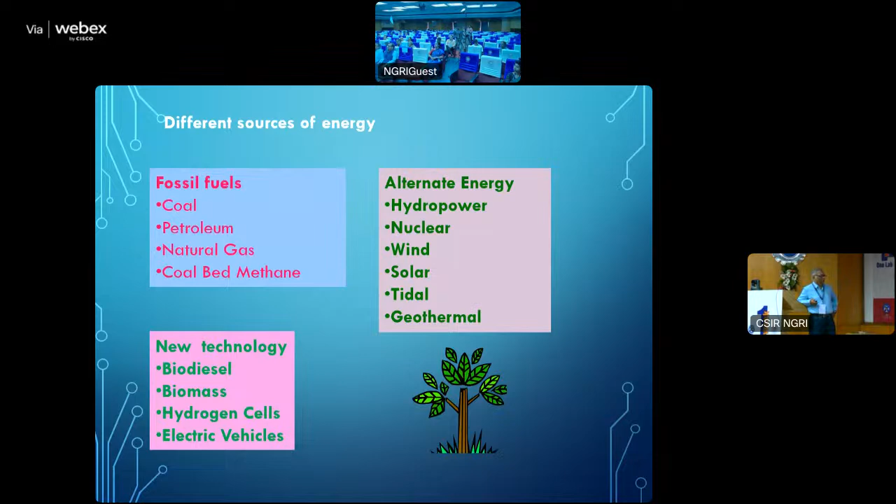The main geothermal fields are mostly associated with the plate tectonic boundaries. And plate tectonics has given quite a big impetus to geothermal research also.

What is geothermal? Geothermal is a new and alternate energy source, which is a continuous source of energy. It is heat stored in rocks, which is brought to the surface by the deep circulation of water. And this energy is renewable and very sustainable. The plant in Italy, Larderello, has been running continuously for more than 100 years. So there is renewability and sustainability in this energy source.

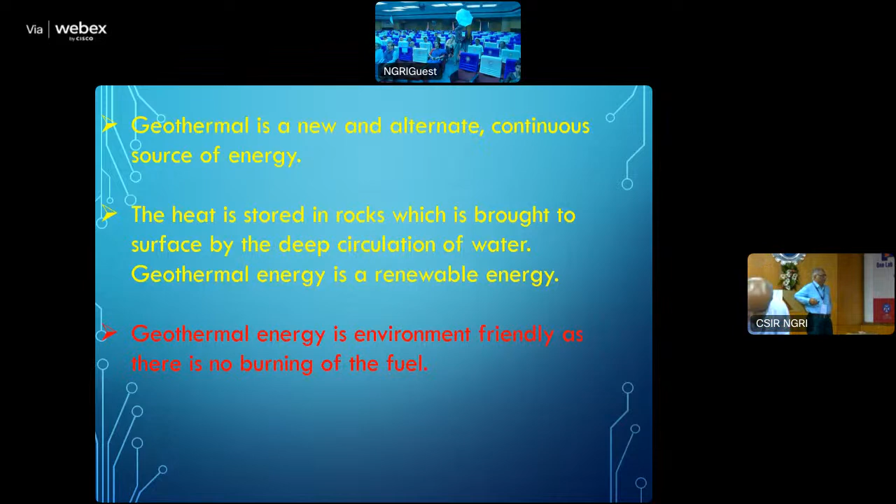And that heat is collected by the water. It becomes quite a hot mixture of steam and water. And wherever it gets a conduit, it comes to the surface in the form of a hot spring. Once we get a hot spring, we try to utilize it for localizing the geothermal field. And then we try to exploit it through drilling and exploration, and get it to the surface for different useful purposes.

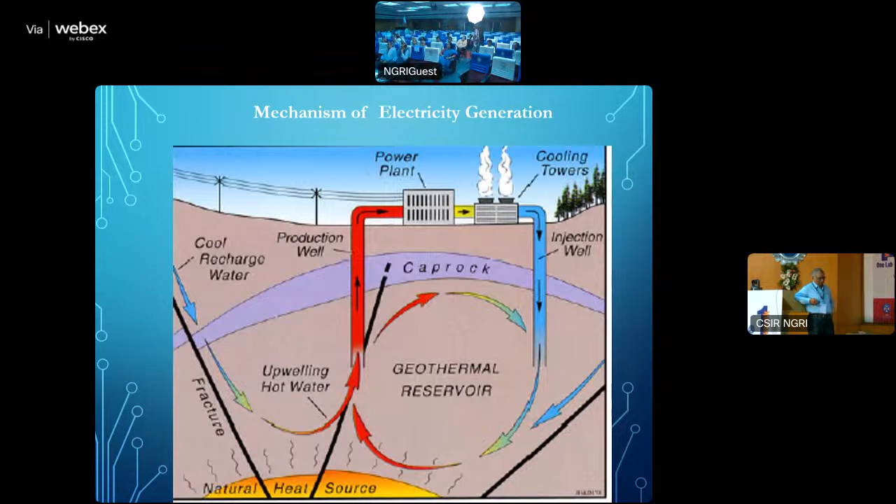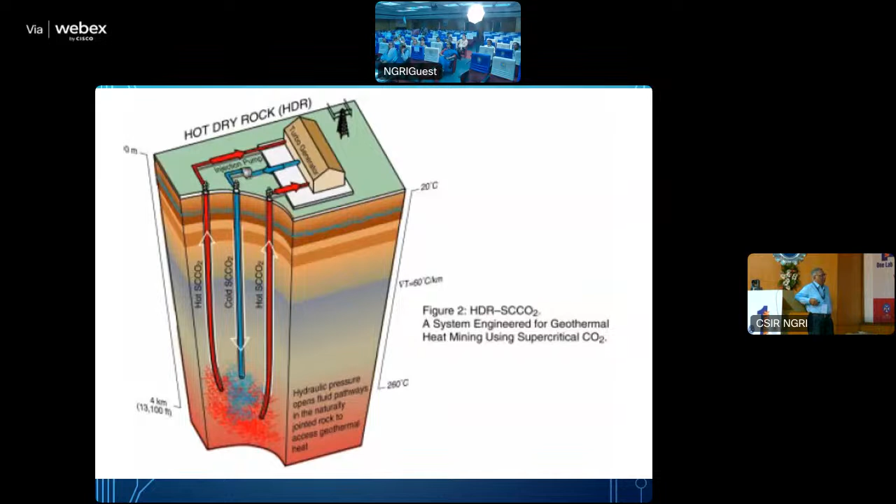When there is no water circulation, the geothermal water cycle is not developed, but the rock is hot. That is called a hot dry rock geothermal system. In that, we artificially put water in the subsurface, and this water is used to create fractures and collect the heat in the subsurface. That hot water is pumped up to utilize in power generation. That is called a hot dry rock system.

What are the geothermal manifestations? A geothermal area is characterized by the main manifestations: hot water springs, steam emission and fumaroles, marshy land. Most geothermal areas will have marshy land because the continuous seepage of water creates it. And mud pools, deposition of silica, sulfur, arsenic, borax, calcite on the surface. And sometimes there is local subsidence, like we find in the Wairakei area of New Zealand.

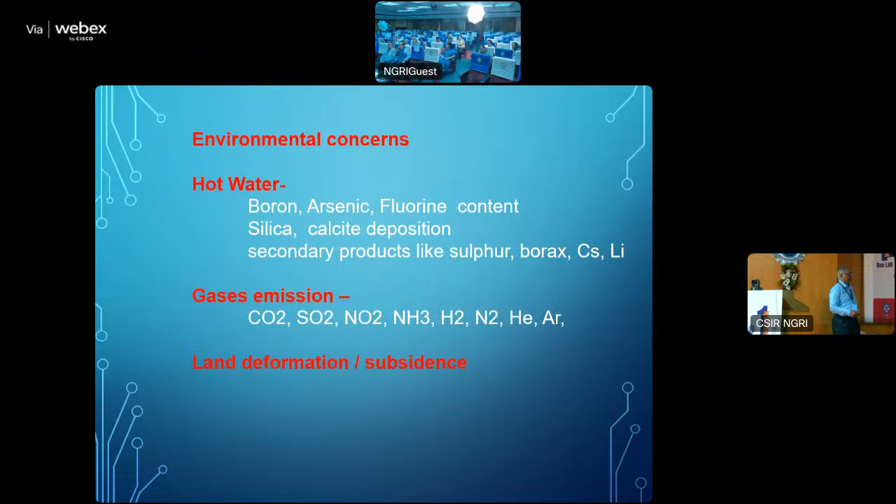And then there are other ancillary uses: food processing, industry, onion drying, etc. And the low temperature ones are utilized basically for aquaculture, then skin care centers, and as very great tourist attractions all over the world.

And heating and cooling, meaning refrigeration or space heating, particularly in places like New Zealand or Iceland during the winter. Shallow, low temperature geothermal water is utilized for heating houses and buildings, and it's utilized on a very large scale.

In China, there is a province called Tianjin, where they are substituting electrical energy for heating purposes, almost 150 megawatts per year. So such large scale utilization for heating and cooling purposes is also possible.

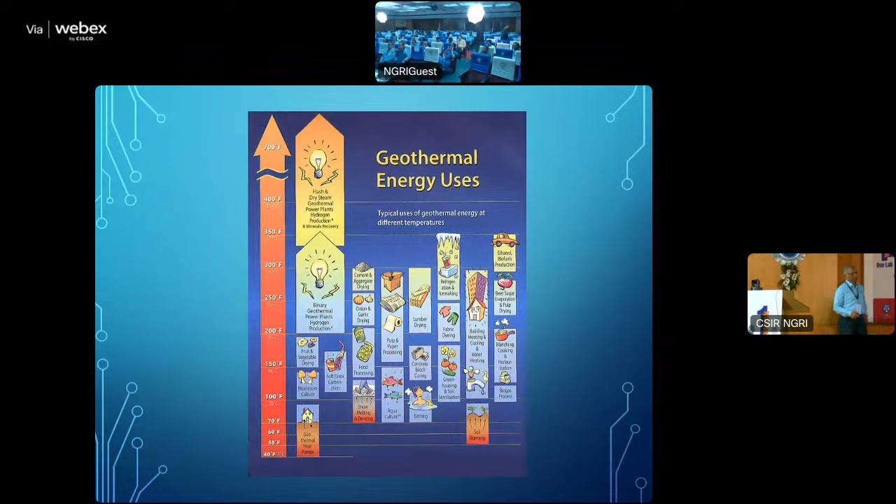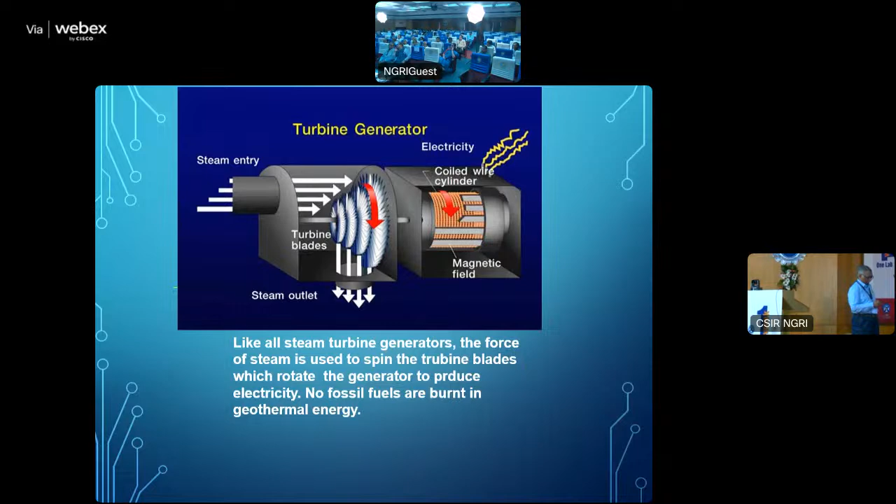I think this I need not explain because it has already been done, but this is a direct dry steam generator. Once steam is separated from the geothermal water, it can be directly utilized in a turbine to drive the turbine and generate electricity. The second one is the binary cycle power plant, which was explained by Dr. Saraswat, so I will not repeat it here.

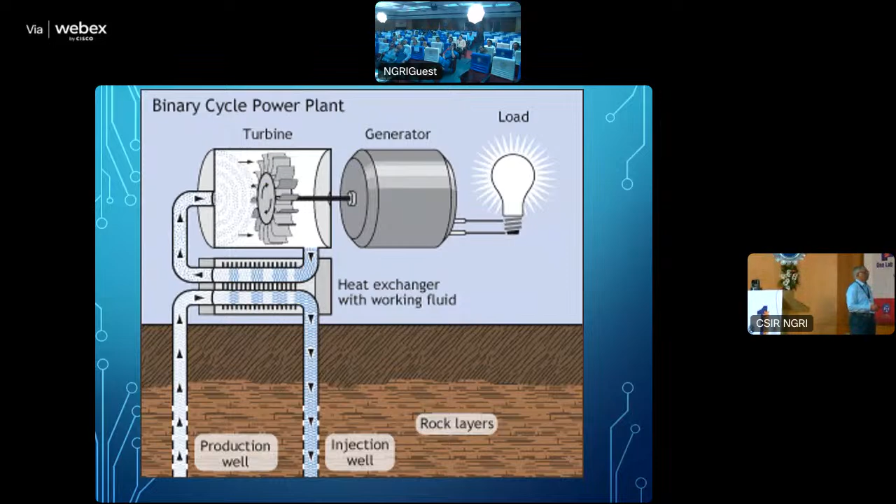So what are the main uses of geothermal? The main uses are binary cycle power generation, particularly in India, agriculture and aquaculture. This is a very large scale utilization. Aquaculture means we have crocodile farming, we can have fish farming, and in agriculture, greenhouse cultivation, as well as, particularly in places like Sweden or even Switzerland, clearing large scale farms through thawing during winter, geothermal water is utilized.

Spa, balneology, refrigeration and cold storage, then industrial applications and desalination. Nowadays, geothermal water is utilized for this purpose also. Greenhouses, sericulture. In Tatapani, when we started initial work, this geothermal hot water was utilized for sericulture purposes, and there was quite a good industry. Now, somehow it is not working there, but there are so many small scale and ancillary uses which can help the local population have some additional income, and extraction of rare metals and minerals.

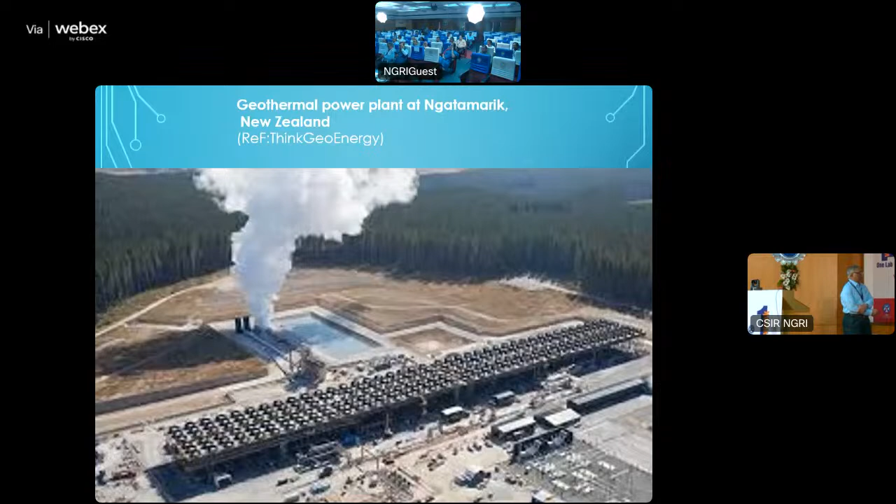So how a geothermal plant can look. The area is a forested area. In between there is a geothermal plant, and nowadays they are using air draft cooling also, so very high cooling towers are not required. The main problem here is the steam emission. That steam emission creates a sort of humidity there. But otherwise, it's a comparatively much cleaner power plant.

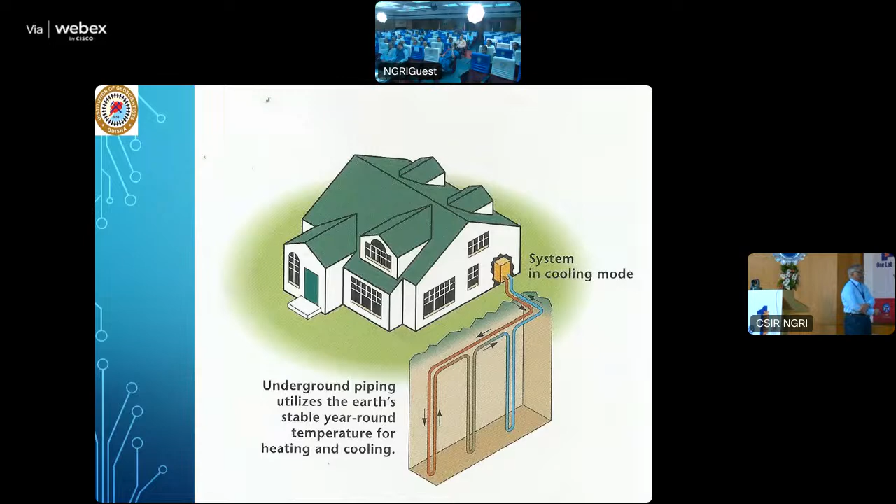This is the major use, particularly in New Zealand, Iceland, and nowadays quite common in France also - a heat pump heating and cooling system. During winter it's used for heating, and during summer it can be universally utilized for cooling. The pipes go into the earth around 30 to 100 meters depth, and water is circulated as per the season, so we can have both heating and cooling cycles. This is a good substitution for electricity and contributes to lowering carbon footprints. In Japan, where we used to stay, they utilized this heating and cooling system to heat hotel rooms - the complete hotel was based on this geothermal heating and cooling system.

What is geothermal? Geothermal is site specific - that is one major problem with it. It is useful in remote areas. It is renewable, environmental friendly, and now technically feasible at all temperatures and all places. It can be utilized as per your requirement. Production units are available from a very small unit, 100 kilowatt to 100 megawatt size also. Practically in India, we are having a 20 kilowatt power plant which we are coming up with.

The types of geothermal resources: two-phase, hot water and steam. Single phase, only steam or only hot water - this is called dry steam. And there is dry phase where there is no water and no steam, what is called the dry hot rock system. Divided by potential: 250 degrees centigrade and above we call high potential. Intermediate potential is 125 to 250 degrees centigrade, and low potential is below 125 degrees centigrade, which can be utilized for binary cycle and direct uses.

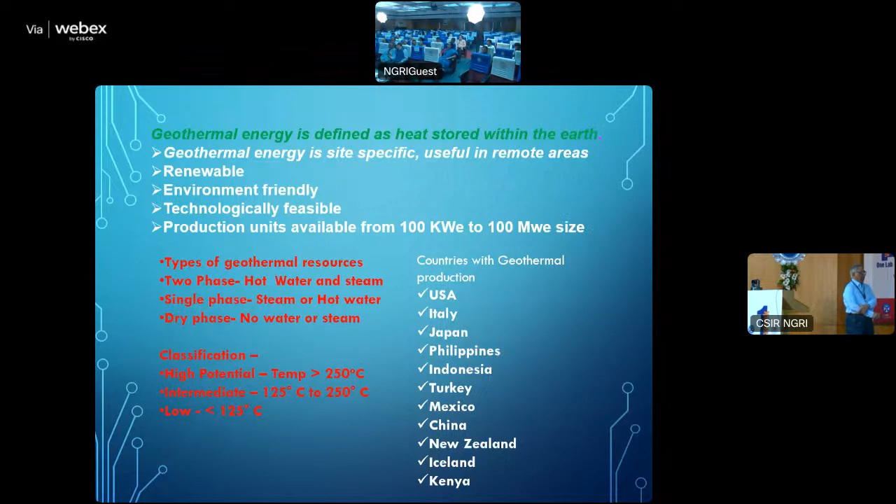The distribution of the geothermal plants in the world - Australia is also coming up, but there we have a dry hot rock system, and they are trying to produce electricity through this dry hot rock system. Rest of these are mostly steam-based plants. Turkey, France particularly, they are using low temperature geothermal for heating, cooling purposes and other ancillary uses. In USA, in any case, they have more than 3,000 megawatts of electricity generation by geothermal system only. New Zealand, in any case, is very famous - Auckland, Wairakei and Ohaaki.

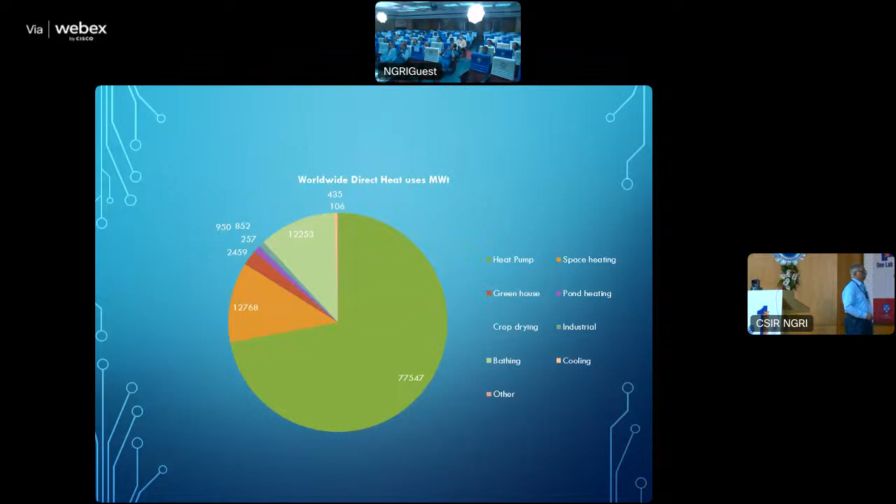Quite different uses there - it can be utilized to substitute fossil fuel energy. So what are the possible uses particularly in India? Thermal geothermal power plants for temperatures of more than 100, 200 degrees centigrade, and binary cycle power plants are feasible. Food processing - fruits, seaweed drying, vegetables, onions, fishes, etc. Industrial uses - timber washing, sericulture. Low temperature uses can be space heating, vegetable cleaning, small scale industry possible at Puga, Manikaran, Parbati Valley in the Himalayan belt. Then greenhousing.

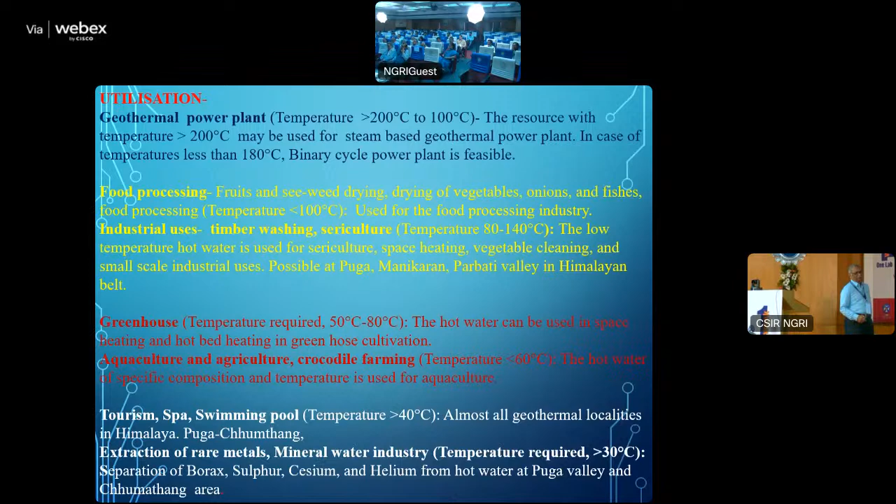Culture and tourism - we have a number of tourist localities in Himalayas, particularly Joshimath, even Leh, Ladakh, Chhumathang, which we talked so much about in the morning. It has become a very important tourist center, a resort - 2 or 3 resorts are coming up there. And if you go to the West Coast, there is one place called Tural, in Ratnagiri district. We have a very good geothermal resource there, and it is actually developed by private people, and they are very popular.

The carbon intensity of electricity generation was already discussed, but wind is around 12 grams of CO2 equivalent per unit of production. Nuclear is 16, biomass is 18. Solar, no doubt, varies depending on the type we are using. Geothermal is around 45, it comes to 35 to 45, it's said. So it is a very low carbon footprint energy.

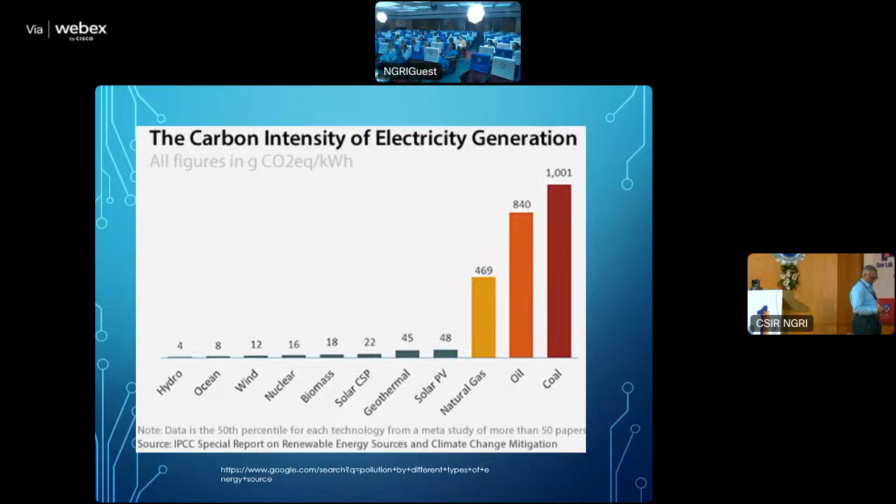Of the geothermal, this is one major factor actually discussed every time, whenever we go anywhere, any meeting, any place, any seminar: what is the cost of it? It's said that it's a very high cost, but the thing is, the drilling cost depends on the rock type and the depth.

Geology and the structure there, and the depth you are drilling. Then the temperature - high temperature means more production, so automatically the cost also goes down. No doubt drilling cost is higher, but the overall production cost goes down. Then more the discharge, more the production, so automatically the cost is lower. Then water quality - if we have to process the water before production, then automatically the cost will go up.

And location - mainland or hilly terrain. The cost in Puga is comparatively supposed to be higher than, suppose, if we are taking up the project in Tatapani or West Coast area, because of the logistic supports required. And the method which we are using - binary cycle power plant, or steam-based power plant, or the type of heat exchangers we are using - those things control the cost of the geothermal power plant.

One thing is, this was actually discussed in the ministry MNRE, and that is why I have put it. This has been discussed a number of times in international forums also. When we compare with solar or wind, their production is hardly 8 to 9 hours a day. So suppose production of 10 megawatts is there, we are not getting it throughout the day, whereas geothermal gets it throughout the day. So a geothermal power plant of 10 megawatts is equivalent to 30 megawatts of solar power plant. So that way, if you compare, the cost of geothermal will automatically come down.

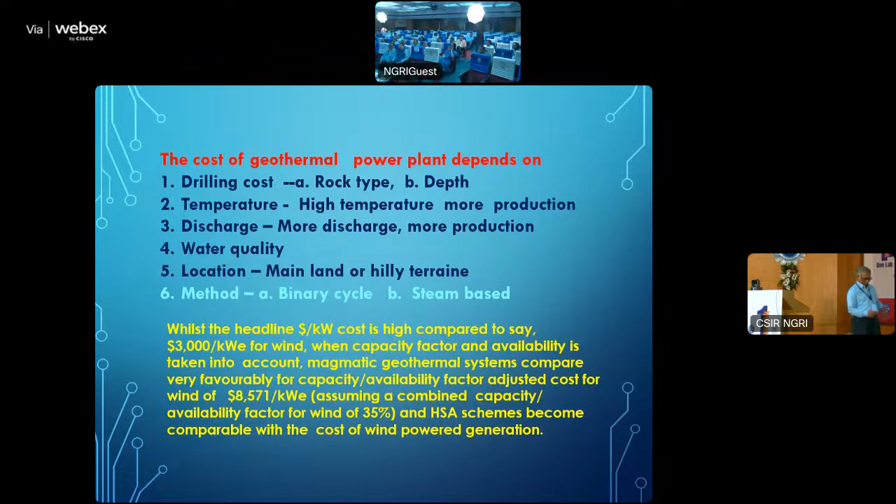The levelized cost - particularly these are the international figures presently. I cannot say that they are really valid for India, but the cost of geothermal will come around $0.08, that is around 8 to 10 cents if we go for a bigger plant. If we try to calculate the cost for India also, particularly in Tatapani and Chhumathang, it comes to around 8 to 10 rupees, if our production means plant capacity is around 3 to 5 megawatts.

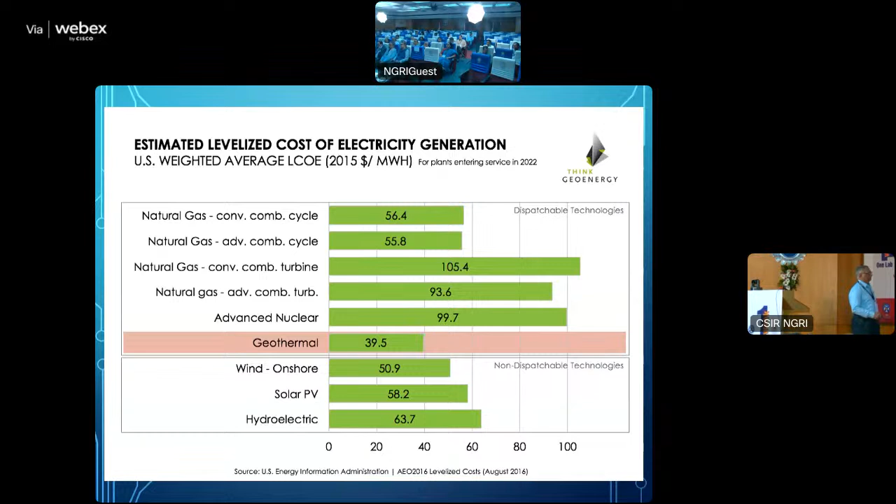The same slide - if you see here, it's around 0.4, but this is in the US with steam-based conditions, where there is a temperature of more than 200 degrees centigrade. We are getting 4 cents per unit - that is the production cost.

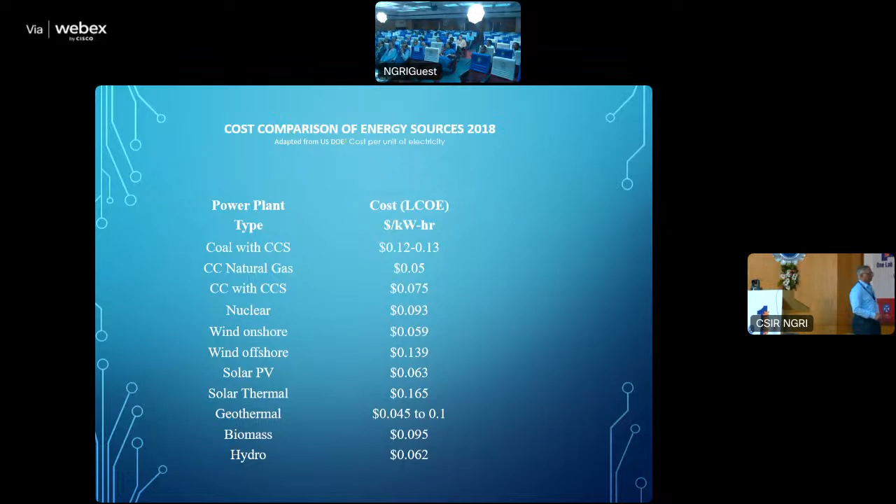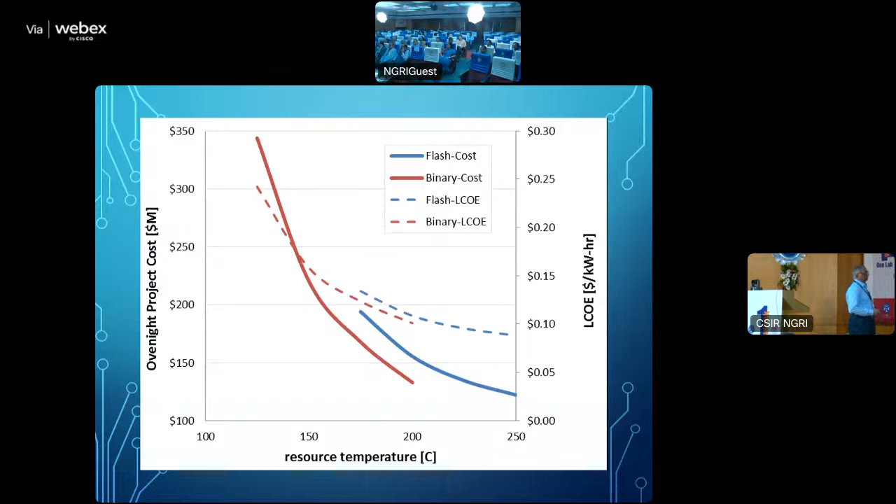The graph shows that if the resource temperature is higher, automatically the cost of production goes down. Higher the resource temperature, better is the production, lesser is the cost. Accordingly, higher the well flow rate, meaning the yield is higher, hot water yield is higher, automatically the cost of production goes down. So these two factors will generally control the cost of geothermal production.

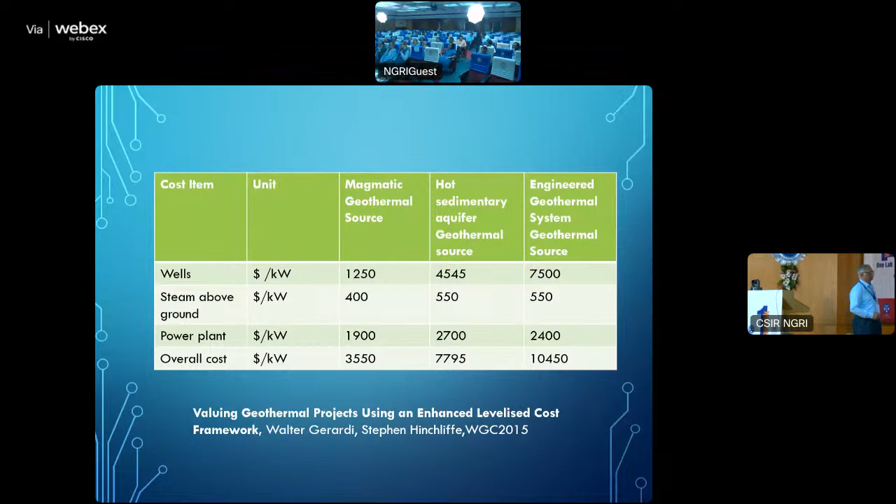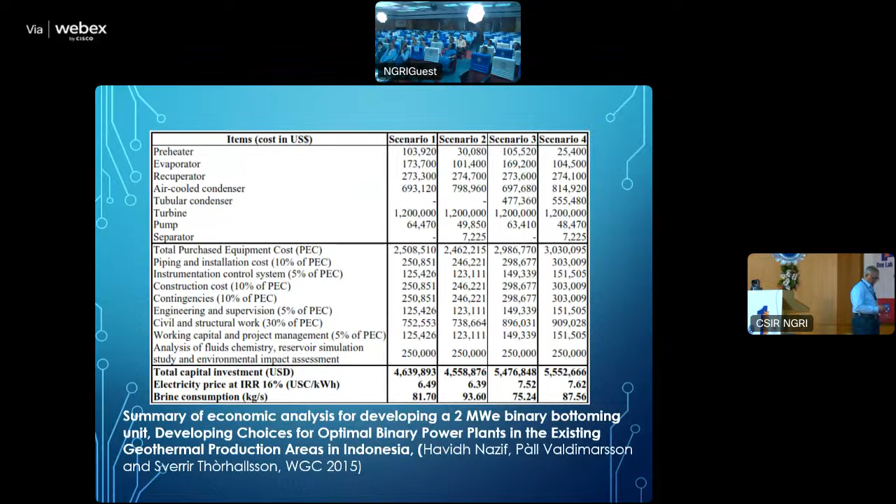So we have no doubt, we cannot immediately compare with the cost of solar. But if we see, the costs are manageable if we go for higher capacity and if we start commercial production when things become comparatively easily available.

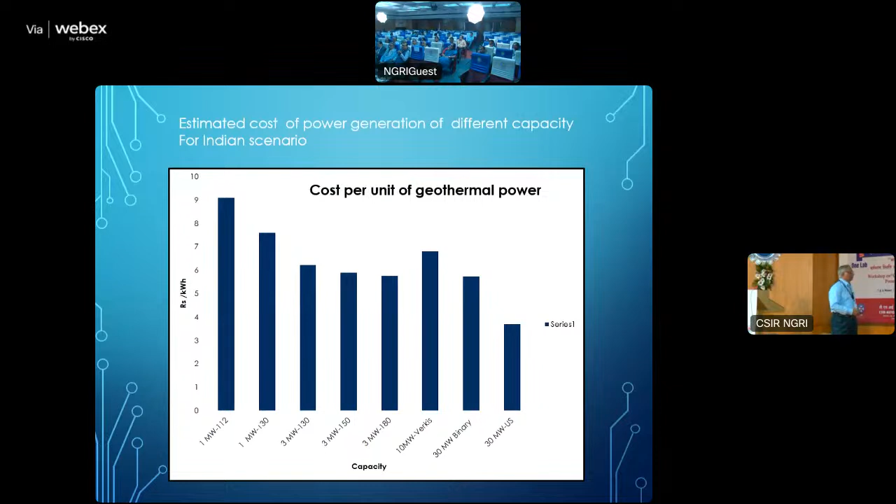The power generation presently capacity in India, I don't want to go in detail here.

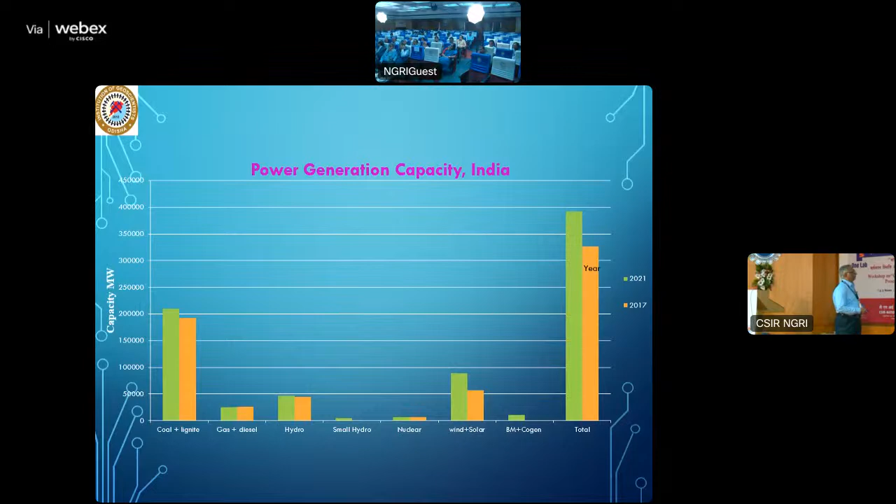This is the west coast area where there are 18 hot springs. The northernmost is called Sativali, then Ganeshpuri near Bombay. Then we have a very promising Unavare Khed, Ratnagiri district, and the last one is Rajapur, which is a very famous temple. These are the places.

In Godavari Valley, we are getting hot springs at Manguru, and at Manguru GSI has done quite a lot of work, based on which the Singareni Collieries and the Sri Ram Institute of Industrial Research are putting up a 20 kilowatt plant. These are the different provinces we have divided into geothermal fields of India.

Chhumathang, which is a very hot place and much in discussion, is located 180 kilometers east-southeast of Leh, Ladakh in Jammu Kashmir. Now it is a union territory, no doubt. The elevation is 4,400 meters.

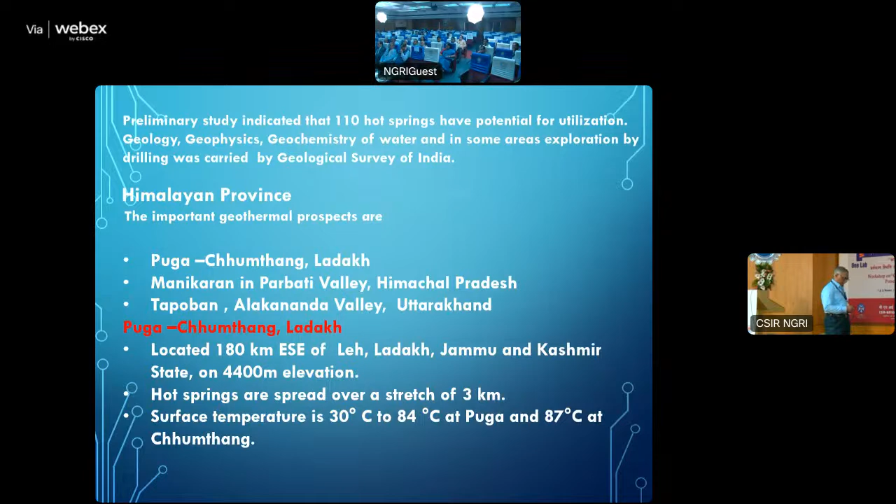We can expect up to 180 to 260 degrees by various methods. The range is very high, but it certainly indicates that this is a very promising field where we can get temperatures of more than 200 degrees centigrade.

This is one major drawback there, deposition of sulfur and borax at Puga. But there is an additional advantage: cesium was extracted from the hot water of Puga in association with BARC. This is an additional attraction and it is very useful nowadays because the Government of India is very much trying for rare earths and rare metals, for various strategic purposes.

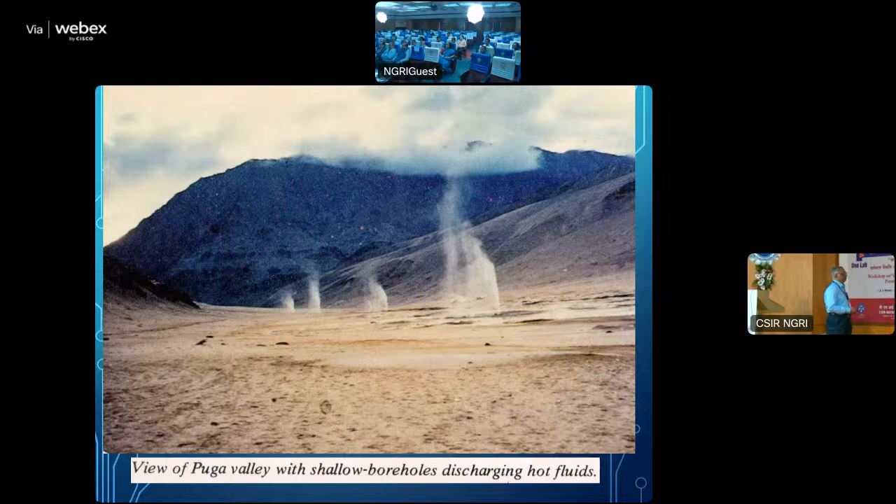It is used for space heating, hutment and poultry farming was experimented here. The photographs of Puga show this spontaneous, artesian flow.

The photograph of Chhumathang area, you can see here are the manifestations. Along with the hot water flowing there, there is a deposition of clay minerals and calcite, and this deposition is partially of sulfur and arsenic minerals. That is where most of the geothermal fields actually look like.

This borehole in Chhumathang was drilled in 2012 for DRDO, and this is giving 120 degrees centigrade temperature, and you can see almost a 40 feet spout. So the pressure here should be more than 1.5 bars.

This field, which we were just now discussing, is also very promising. It has hot springs up to 96 degrees centigrade and an estimated temperature around 180 degrees centigrade. This is a major tourist attraction in Himachal Pradesh.

And the hot water, GSI had actually in collaboration with RRL established a 5 kilowatt power plant long back, 30 to 40 years before, which was destroyed because of a landslide. But presently, the hot water is utilized by Gurudwara for cooking purposes.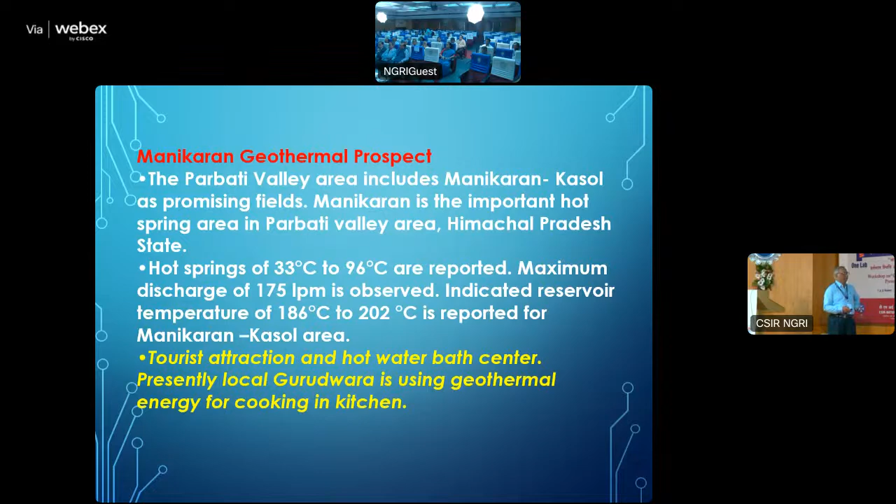Besides this, geothermal water can be used for various ancillary purposes, and this is one major use. The whole kitchen, I have not visited that place myself, but they say that almost that kitchen with 2,000 capacity per day is totally dependent on these geothermal hot springs at Manikaran.

Tapoban and Joshimath. Joshimath is near Badrinath. This is also a promising field, and presently we are getting some inquiries for development of this particular area. So direct heat utilization, particularly in this area, is planned. Let us hope that something comes up here.

Central India: Tatapani, Babeha, Anhoni. Anhoni Samoni is near Pachmarhi, which is also a tourist place. Tatapani is in Chhattisgarh. This is a very promising field, which we'll deal with here. And then, as I already discussed, the west coast area.

Tatapani is where GSI drilled 26 boreholes. We are getting surface temperatures of hot springs of up to 97 degrees centigrade. Out of these 26, 5 boreholes were giving hot water of more than 100 degrees centigrade on the surface. These were at a depth of 350 meters only. At 200 meters we are getting a maximum temperature of 112 degrees centigrade; when water comes to the surface, it is more than 100 degrees centigrade.

The discharge of individual wells varies from 230 to 300 LPM. Total discharge here initially was 1800 LPM, which is presently around 1125 liters per minute. So with 1125 liters per minute and an estimated reservoir temperature of 160 to 190 degrees centigrade, we are planning with the available resource to have at least a demonstration plant of 100 kilowatt at Tatapani. The proposal is already submitted to MNRE, and last year it was accepted in principle.

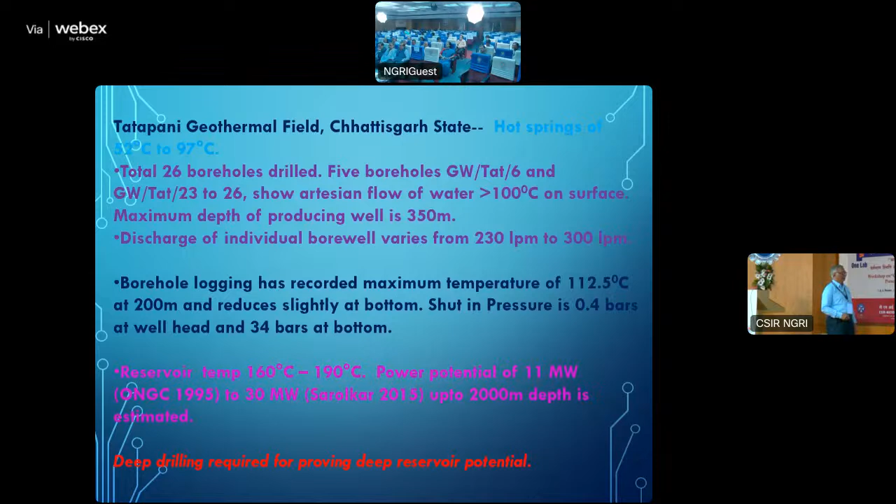The drilling in operation at Tatapani. The overall view of the Tatapani field. You can see the area, it's a plain area, and there is continuous steam emission. There are 5 boreholes. This is one borehole that is giving continuous steam when there is a flow. The boreholes are actually under control.

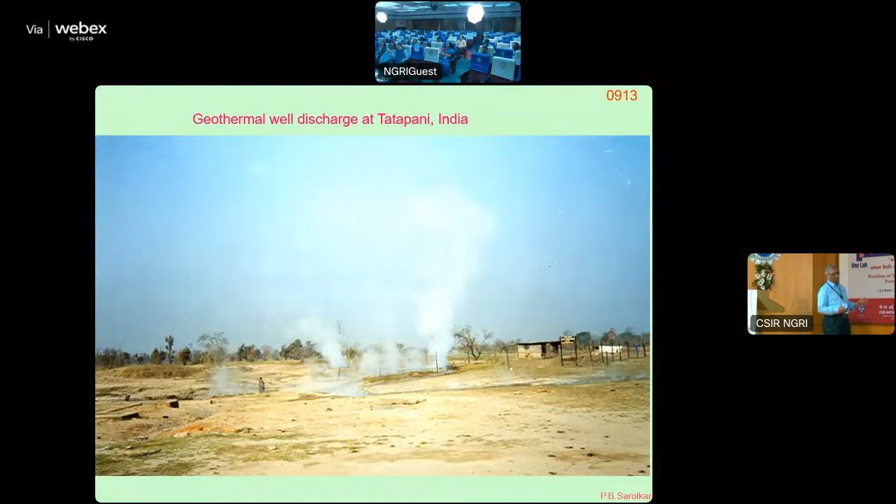For the last 30 years they have been monitored intermittently. The temperature and discharge are almost normal; there is hardly a difference of 5%, depending on the season. Geothermal is a very sustainable resource once the geothermal system is developed. As part of the Tatapani boreholes, this can give a very good idea of how the resource can be and how it can be utilized.

A scientist from Schlumberger had visited this place. When he visited, he had a very different idea about the development of this area. He said that in India there are no geothermal fields really worth developing except Puga. When this borehole was opened, he said that now there is no further requirement to convince him that this field is worth exploitation.

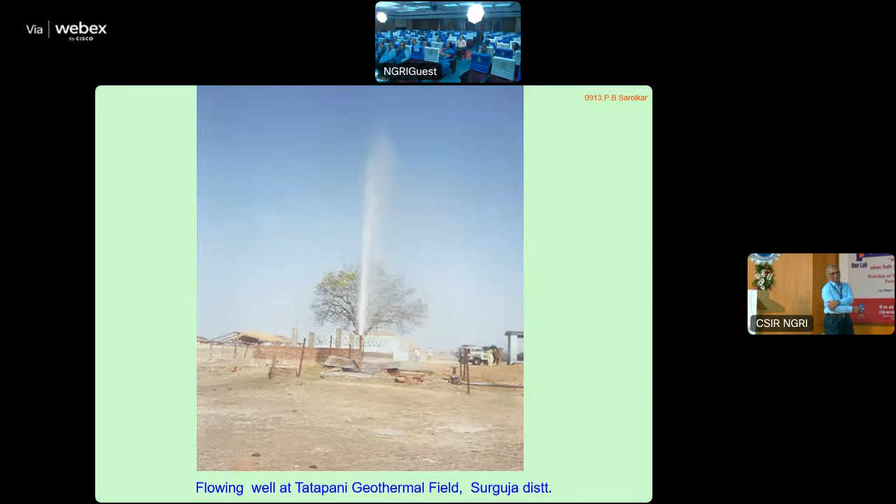Anhoni Samoni is a low temperature geothermal field near Pachmarhi. But this has one very interesting thing. It has 17% nitrogen and quite a high percentage of methane along this borehole. That methane can be continuously utilized for energy purposes. Presently it's used for burning purposes, so sometimes people cook food by burning that methane.

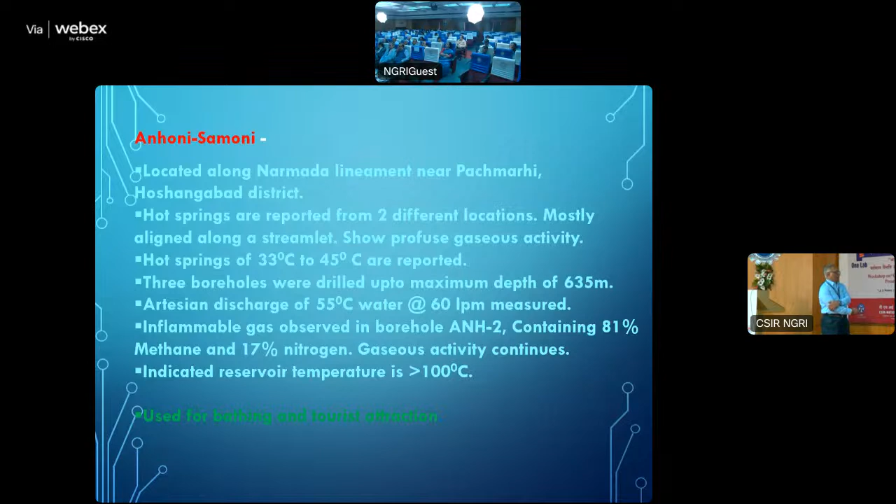The location of hot springs along the west coast: Thane district, Ganeshpuri. In the north there is Sativali, Unhavare Khed, and lastly Rajapur. Unhavare Khed has a high temperature, and actually a 1 megawatt power plant was initially planned. There is one place called Tural, the Tural project by Thermax. I think perhaps sir can talk more about that.

Ganeshpuri and particularly Sativali are much more useful for development because they have two advantages. They are on the main road, and they have a lot of tourist attractions and tourist flow there.

Tantloi is one very important geothermal field. Though the temperatures are less here, 48 to 70 degrees centigrade, the flow is quite high. This Tantloi is around 20 kilometers away from Bakreshwar, which is also giving a temperature of 70 degrees centigrade with high flow.

So there is one paper, I think, in this workshop we are presenting, that there is a possibility that Bakreshwar to Tantloi, this 20 kilometers area, will be a continuous geothermal field. A very important aspect here is Bakreshwar is having 3 to 7% of CO2 and almost 3% of helium.

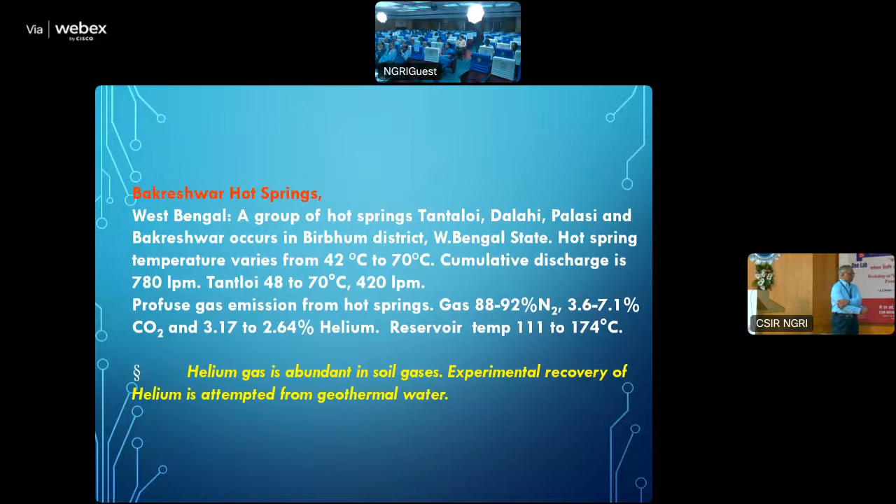Manuguru field, it will be discussed by Sakre sir. Hot springs in Manuguru are giving a temperature of 81 degrees and 850 LPM. A 20 kilowatt binary cycle power plant is being tested there by SCCL at Manuguru. And this will be the first geothermal power plant in India if it becomes operational. So it is a small beginning which can lead ultimately to a major development.

Springs in Gujarat are also at Dholera, Unai, Atri, Tulsi Shyam. At Dholera, PDPU, now Pandit Deendayal Energy University, has established a heating and cooling system using the 68 degrees centigrade water. And they have tried binary cycle power generation also with support of some hybrid method, but it's not a very successful one; it's operational occasionally.

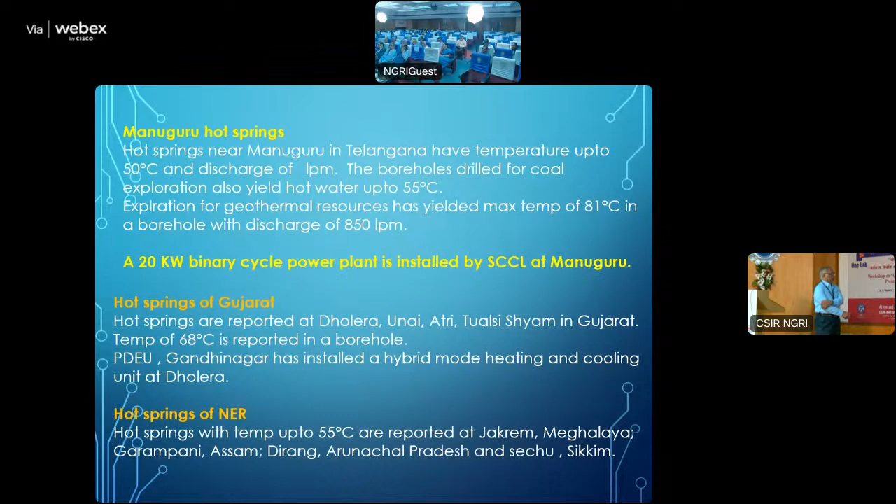Then hot springs in NER, particularly in Jakrem and Tawang, they are worth... This is the photograph of the team, Sri Ram Institute, GSI and SCCL, which has been instrumental in putting this 20 kilowatt geothermal power plant at SCCL Manuguru, and this is the flowing borehole there.

So what is the present status in India? Drilling is taken up in Puga, Ladakh by ONGC for a 1 megawatt power plant. Spring water is mostly used for cooking and similar purposes. Helium extraction is presently going on at BARC Bakreshwar. Tourist attraction places are at Tatapani, Ganeshpuri, Tural, Unhavare, Khed, Bakreshwar in West Bengal, etc. And there is a 20 kilowatt power plant at Manuguru.

A number of standalone activities and research exploration are done by different organizations, but they are doing it in isolation. I think it is required to have some common platform where there is an exchange of data. The possibilities: binary cycle power plants can be done at Tatapani, Chhattisgarh, Puga, Ladakh, Tural, Ganeshpuri, Manuguru in Telangana, Manikaran in Himachal Pradesh, Anhoni Samoni in Madhya Pradesh, and hot springs of Tawang particularly.

Tourist attraction places, particularly hot water baths and spa centers, can be done in all these places. Refrigeration and greenhouse cultivation on the West Coast of Maharashtra, Puga, Ladakh, Tatapani, Manuguru, Joshimath. This is a very important but neglected hot spring. Some hot springs of Gujarat also, where refrigeration and greenhousing can be done.

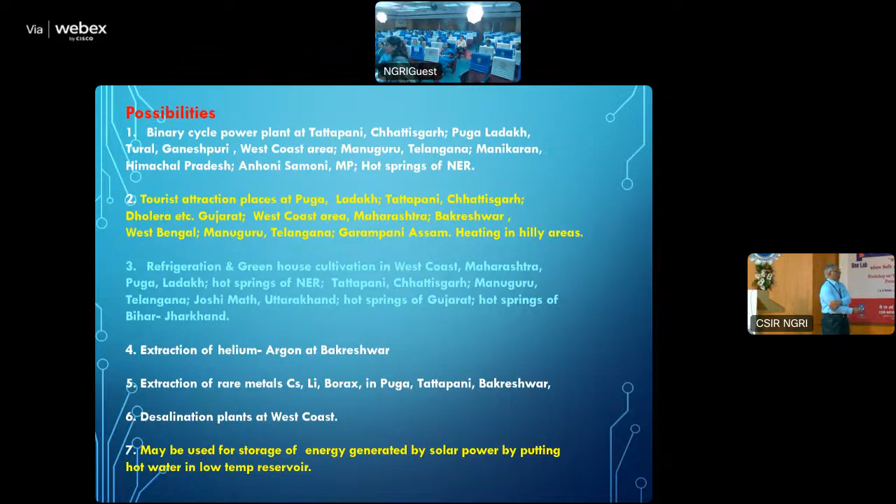Cost of geothermal production is compared with solar power. Solar power is presently very cheap, but initially we were given an incentive of almost 40 rupees per unit, so that should be considered here. State governments are yet to form any process for giving geothermal project approvals. The authorities are not aware of the utility of geothermal energy. It has less potential as compared to solar energy; that is the impression, but it is more useful in development of remote areas.

Geothermal exploration is expensive. Deep level exploration is required. Funding is presently not easily available, and scarcity of trained manpower and machinery is one major problem. Further requirements from the government side or from the industry side: policy for geothermal exploration is very much required, and the rate of geothermal power purchase. If these two things are decided, I think automatically there will be a great impetus for the development of geothermal energy in India.

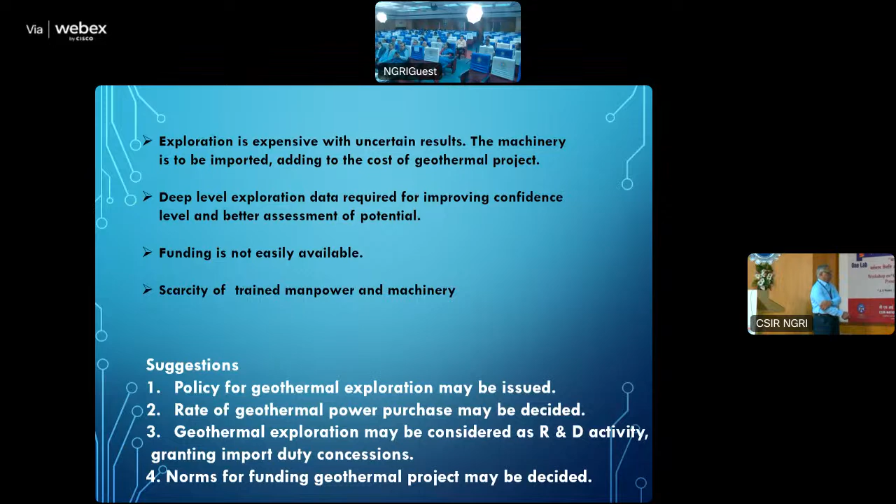Geothermal exploration can be considered as an R&D activity, and accordingly some R&D concessions, import duty concessions, etc., can be given for that. Finance should be made easily available. Gap funding or assistance is required for geothermal exploration and power plant installation. If these two things are taken into consideration, it will be much useful. And government should think of at least putting up one geothermal power plant with funding. Once there is one showcase, a demonstration power plant, automatically it will give a lot of impetus to the research and development of geothermal energy.

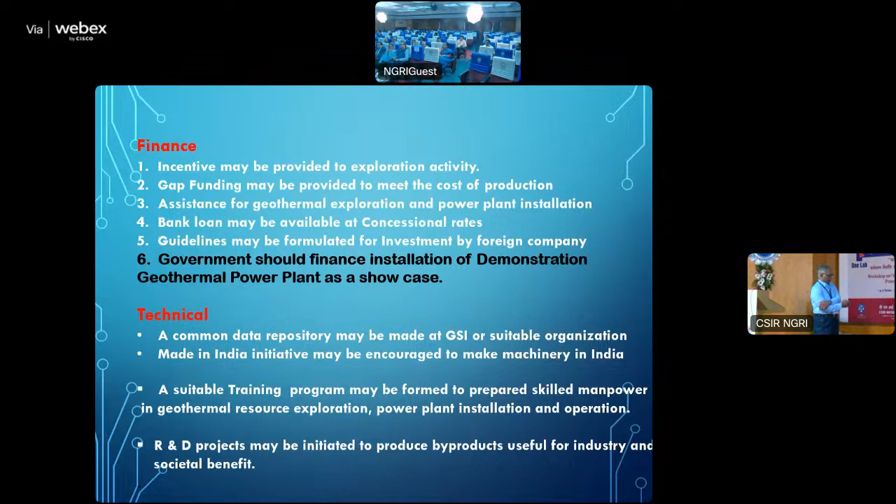Technically, a common data repository is required. Presently there is work in isolation, so data is also in isolation, and there is no common planning for geothermal work in India. Make in India initiative may be encouraged. The way Sri Ram Institute has taken up an initiative, such initiatives should certainly be given impetus to have local power plant generation or local drilling capacity. Suitable training programs are one major aspect, and I thank NGRI for taking up this workshop, because suitable training programs are required to prepare skilled manpower in the geothermal area. R&D initiatives also should be taken up to extract byproducts, particularly for societal or industrial benefit.

This is the last slide, don't worry.

Assessment of important geothermal fields is required, so that with a revised heat flow map of India and reassessment of potential with improved technology, we can certainly have better results of potential, and planning can be done accordingly. And priority for the development of particular fields should be decided. Preparation of a geothermal map of India, then site-specific utilization schemes. If we prepare a proper map with reassessment of the potential of different fields, then depending on the socio-economic conditions, we can have developmental programs for the development of a particular area also.

Preparation of a geothermal development plan and manpower development scheme; a sort of institution dedicated to this is required. Direct heat uses can be encouraged. Public awareness programs, particularly for geothermal, should be taken up. ISRO has taken up a very good initiative nowadays: ISRO has a bus which is explaining all the activities of ISRO, including the present Chandrayaan. A bus is not required, but the major institutions which are doing the work should be on WhatsApp or such social media for geothermal, sharing the geothermal developments and geothermal work.

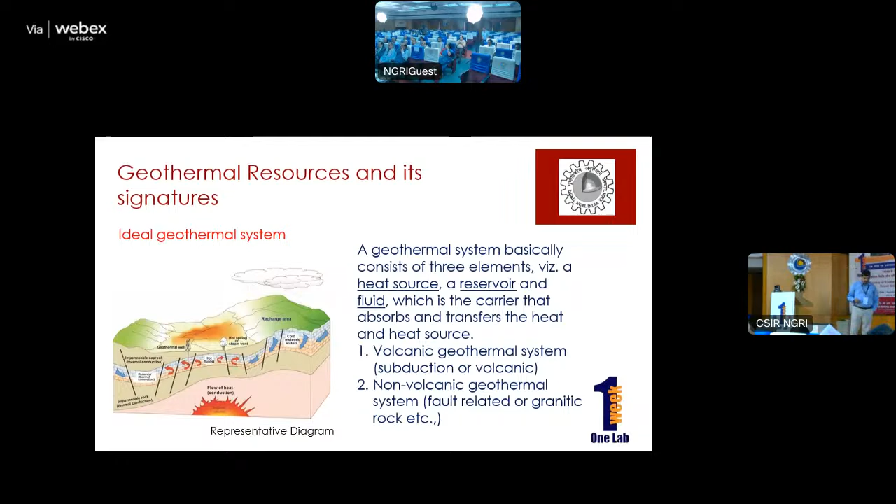We heard a lot about geothermal systems, different types of geothermal systems, but my presentation is with respect to the electrical resistivity technique. In an ideal geothermal system we have a heat source, a reservoir, and a fluid. Based on enthalpy, we call them volcanic geothermal systems and non-volcanic geothermal systems. High enthalpy systems have a scenario like this: the top cap rocks are smectites, illites, and they are represented by low resistive bodies, less than 10 ohm meter, whereas the reservoir is a bit more resistive, around 100 ohm meter, and then the heat source. This kind of scenario is an excellent playground for us to study its resistive properties.

Coming back to the low enthalpy region, in the Indian system it is like this. We don't have a specific model like what we saw in the high enthalpy region. The source is the meteoric water that goes in, gets heated up, and comes up. So this scenario may change from place to place. We don't have a specific model for this.

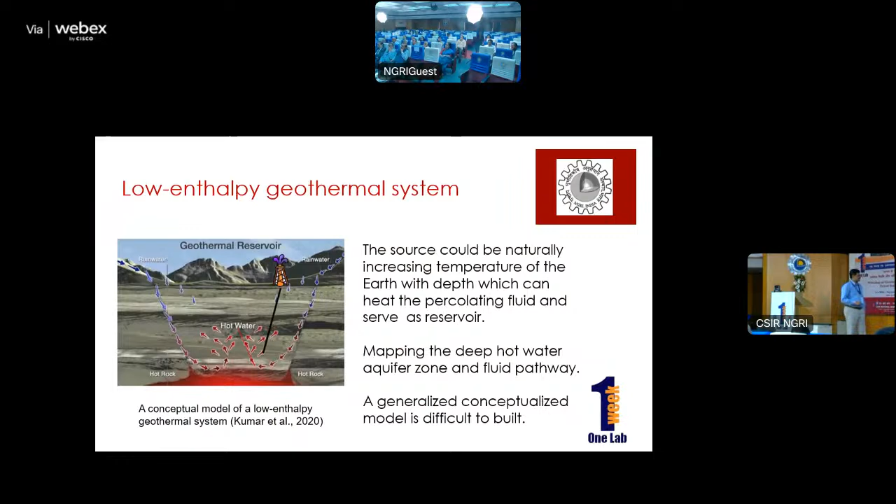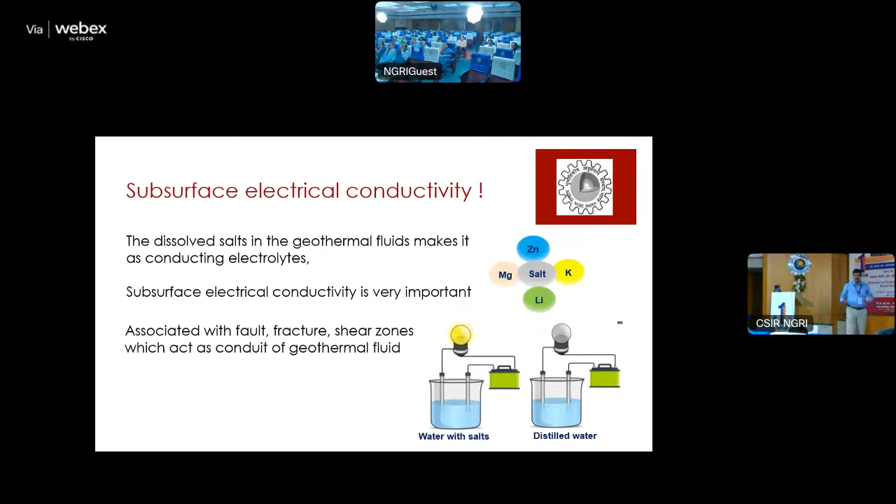Electrical conductivity is important because we have different dissolved salts embedded in these geothermal fluids, which make them a conductive electrolyte. And these fields are associated with faults, fractures, and different shear zones, which act as conduits for the geothermal fluid to come up. Hence, MT plays a major role here.

A number of questions are to be asked to go for exploration of these geothermal resources. First is identification of the reservoir. Then the boundaries are to be mapped, which will tell us the life cycle of this geothermal system, possible drill locations, and the different cap rocks, the nature of the cap rock. That is where MT can address all these questions.

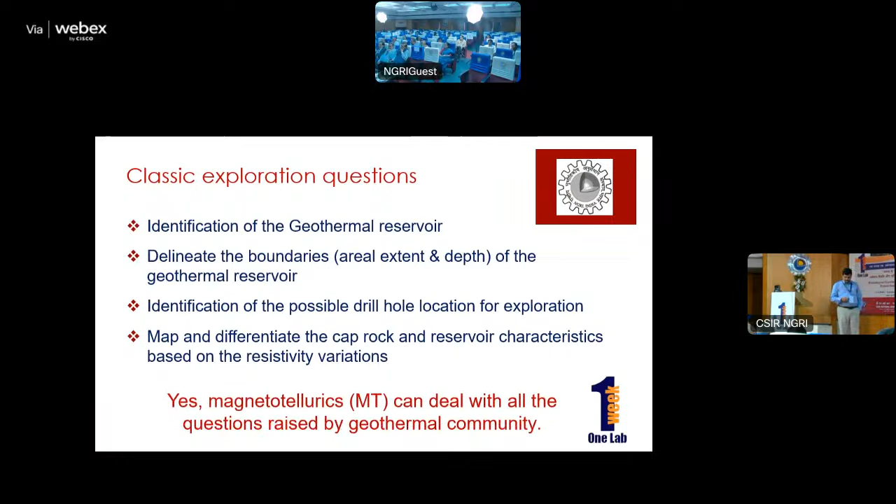Give a brief background of this technique and its capability. This basically depends on the skin depth principle. You have the depth of penetration, which is proportional to the resistivity of the subsurface and the period. For example, if you take three waves, the high frequency wave can measure up to shallow depth. Similarly, if you give it a longer period, they go up to very deep.

The idea behind this is that if you use this electromagnetic technique, then you can image the subsurface from hundreds of meters to hundreds of kilometers. That is why the technique is becoming more used worldwide for mapping thermal resources.

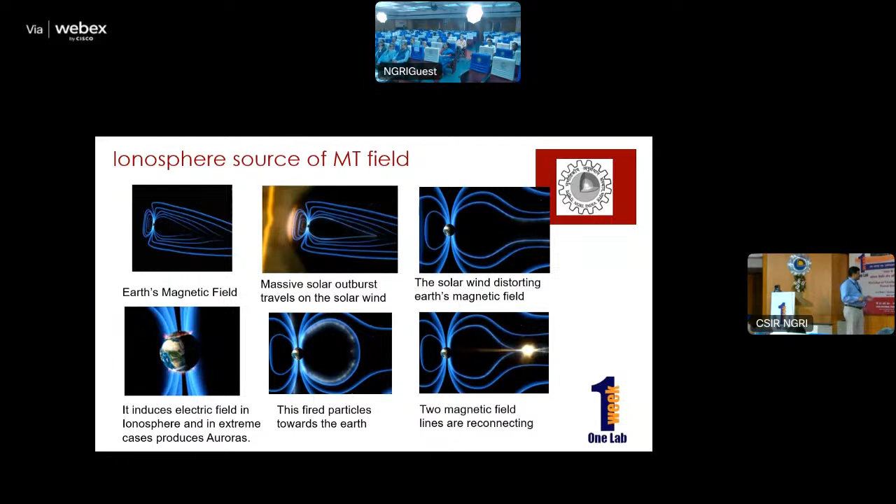Sources: in this case, we don't use any artificial sources. These are natural sources. The source comes from two parts. One is ionospheric sources. The ionospheric sources interact with the Earth's magnetic field, and then they generate this EM wave, which comes and interacts with the subsurface and gives us back the secondary currents.

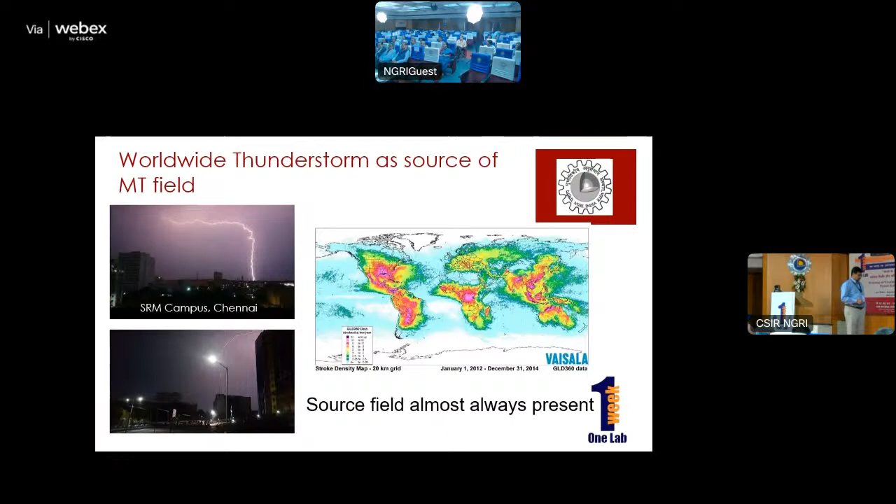Other sources are the thunderstorm activity. They are the high frequency sources, we call them. Any time of the day, we can see thunderstorm activity going on. These two sources are the input data for us, from where we can get from the shallow surface to the deeper surface.

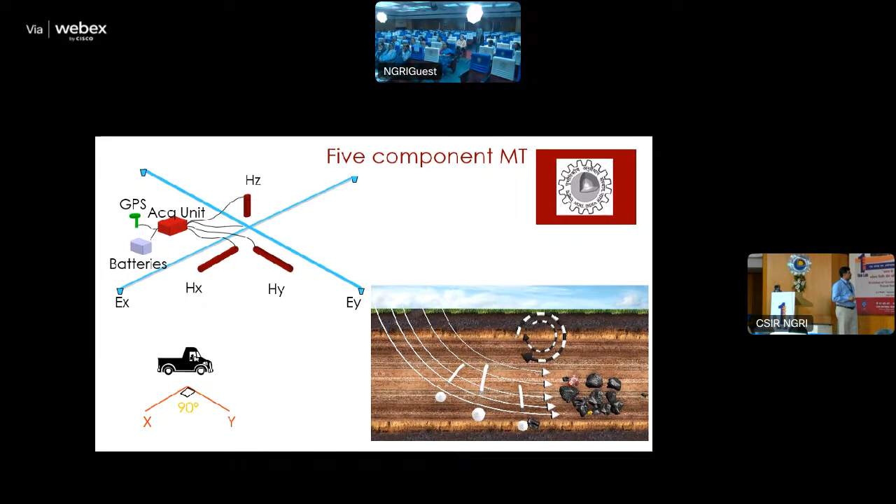A small movie shows how the input wave interacts with any of these conductive or resistive bodies, and they generate the secondary EMF, which is measured through these induction coils. This is how this data is acquired. We have five components: three magnetic field and two electric field we measure. Using these five components, we derive the impedances of the subsurface, which in turn gives the conductivity distribution of the subsurface.

Just for clarity's sake, when we talk about the MT data, broad range, I plotted here three kinds of MT data. The AMT data is very high frequency data, and then we have broadband data and LMT data. So whenever I'm talking about MT data, I'm talking of everything, but depending on the target, we use these kinds of data sets.

So what is happening now? Previously, people have worked on different regions using the MT data, but they used only some part of the MT data to interpret it. For example, we measure all the four components. You see we've got four curves here. You only use two curves to interpret because you do 2D interpretation. As a result, we do not get complete information of the subsurface, which I'll show you in one of the examples.

So now we started using all the four components. For this reason, in 2015, NTPC approached NGRI to relook into the Tatapani data, where we do the 3D inversion.

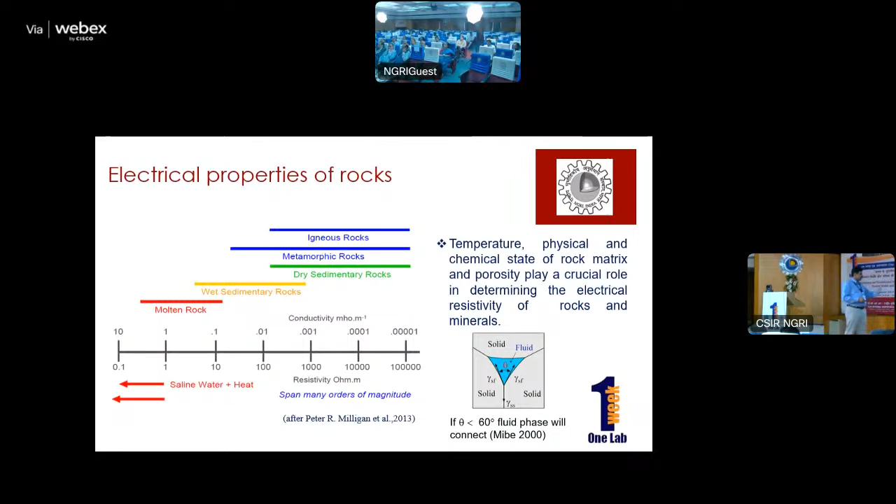So I just bring it back to you here. MT can deal with geothermal targets. A very important figure where you can see that each part of this structure, this model, can be converted to a resistivity image which can be detectable.

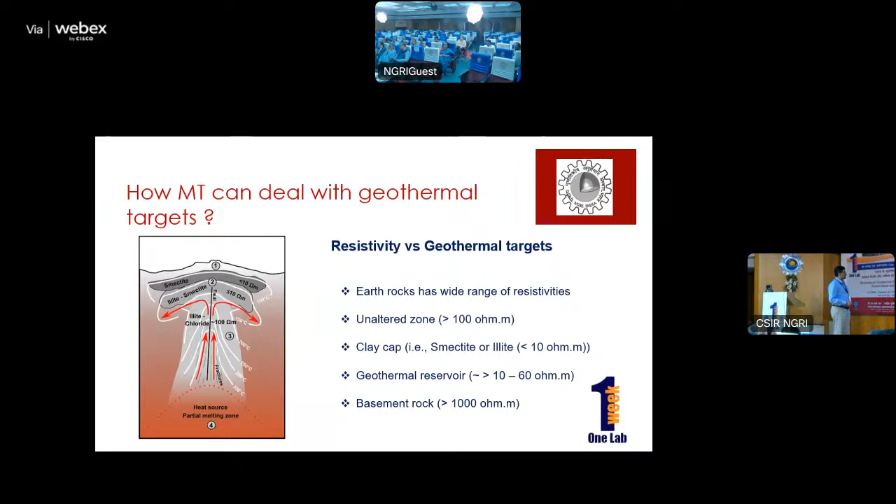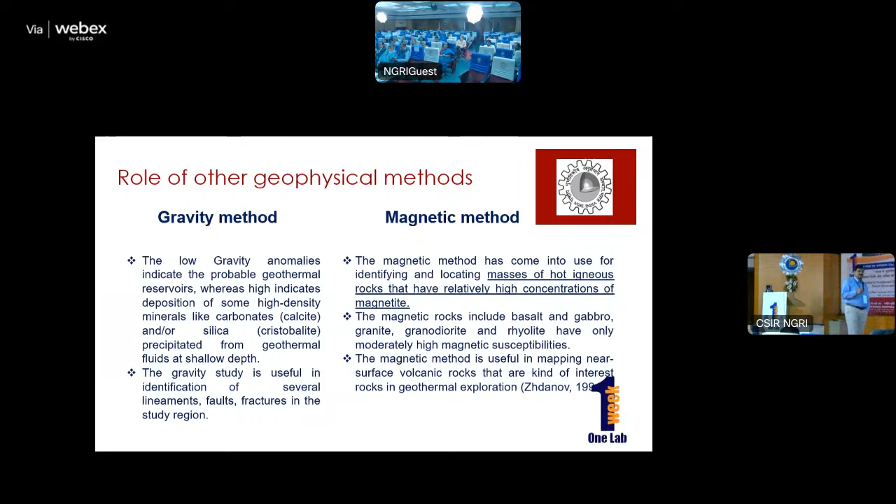Not only NGRI, there are a number of institutes in India actively doing MT studies. Recently, I saw one paper from Mangalore, they have done an MT study, and in Gujarat, PDPU and ISR have also done studies. ISM did studies. So a number of institutions are involved in doing MT studies.

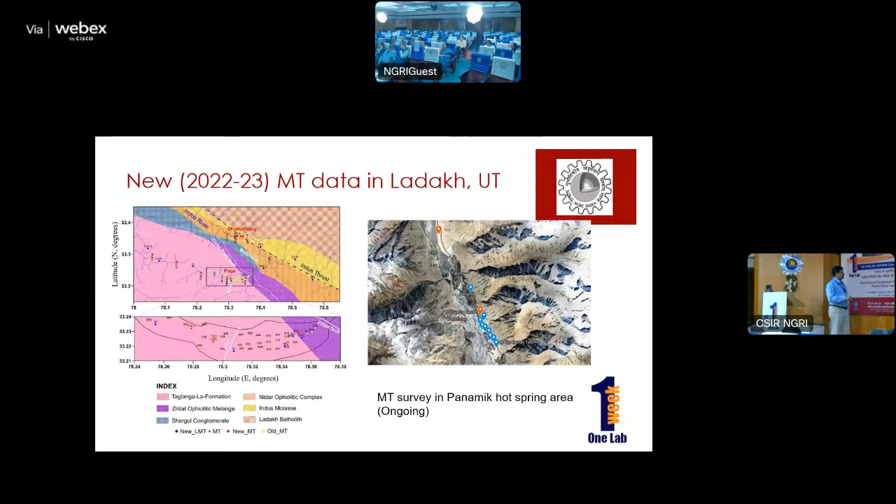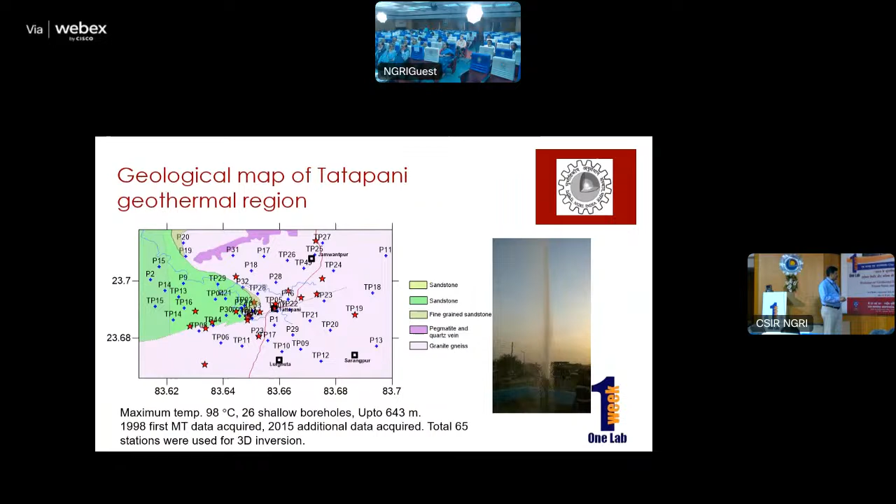The idea is to see what we are seeing below. So this is the Tatapani fault. Not only that, we also did control source AMT along a small grid, a small profile, with very close spacing.

So once you run the 3D model here, what you see is the Tatapani fault, and we got two very nice conductive conduits which have a deeper connection. You see the deeper body. But MT also has a problem: if you get a conductor, we do not get the base of the conductor because of frequency limitations. So here we used a broadband frequency range.

Seeing this conductive body, we also planned another survey using long period MT, because we want to go beneath that body. Can we go there or not?

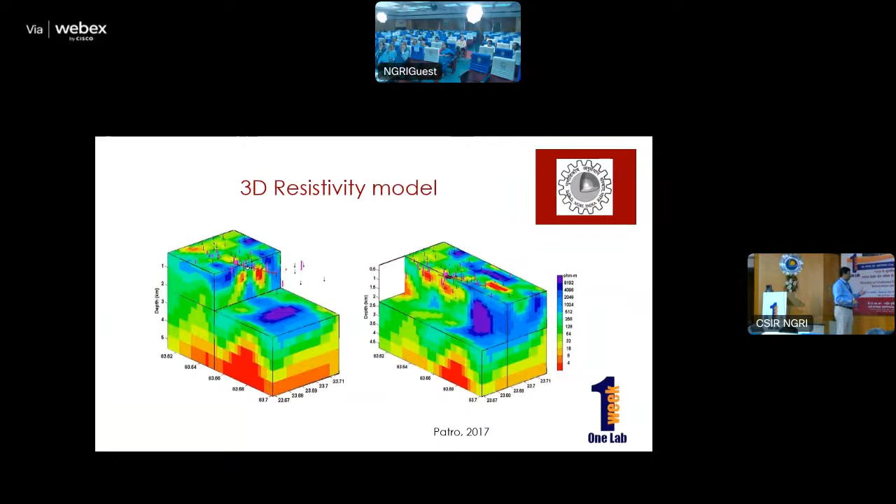So the advantage of doing 3D MT is that you can really scan the earth and see how these things are developing. See these connections from the deeper to shallow surface, and then suddenly this disappears, and the normal granitic crust appears.

So this is near Tatapani where it comes. This particular one is shown as a hot spring, but the other one is hidden. After some time, you see this is undisturbed crust, and suddenly it is coming up.

This kind of view can be helpful for any exploration agency to plan their strategies and also find estimates. This is how we work out on this.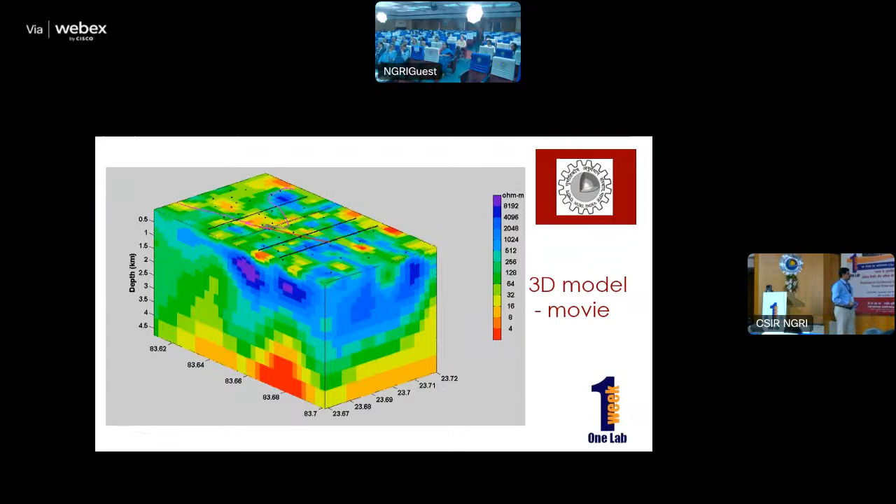As I mentioned, this is the Tatapani area. What we did was go for long period data, a long regional profile, and we are getting a huge conductive body. We wanted to understand what could be the source for this, because if you understand this, then its sustainability can be mapped. Many of these fields go up to 10 years and then decline, so this will give us some strength.

I will not bore you further, but I'll bring you a few examples from the Asian region, how people are doing this work. China is aggressively working on this and has a huge number of stations, though in earlier data they used fewer stations.

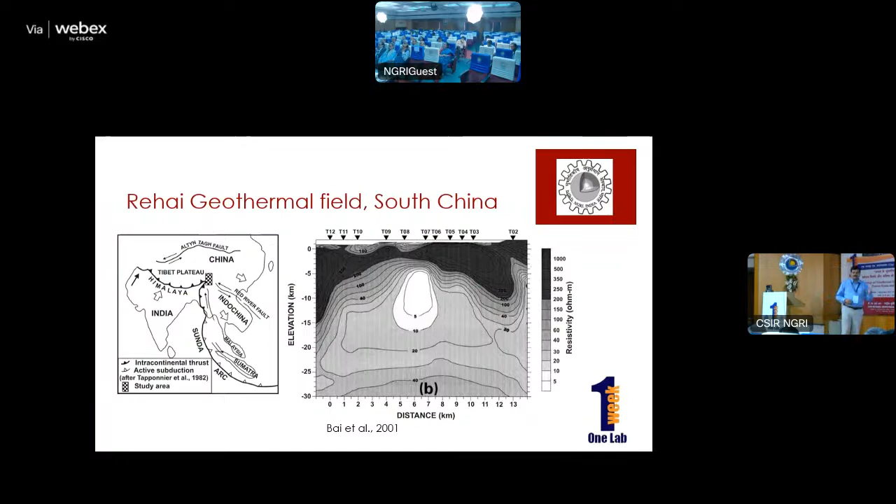This is South China, and they could map this reservoir, which is only 5 to 10 ohm meter, with a cap rock. Why I'm showing this is the efficacy of MT to image the geothermal reservoir.

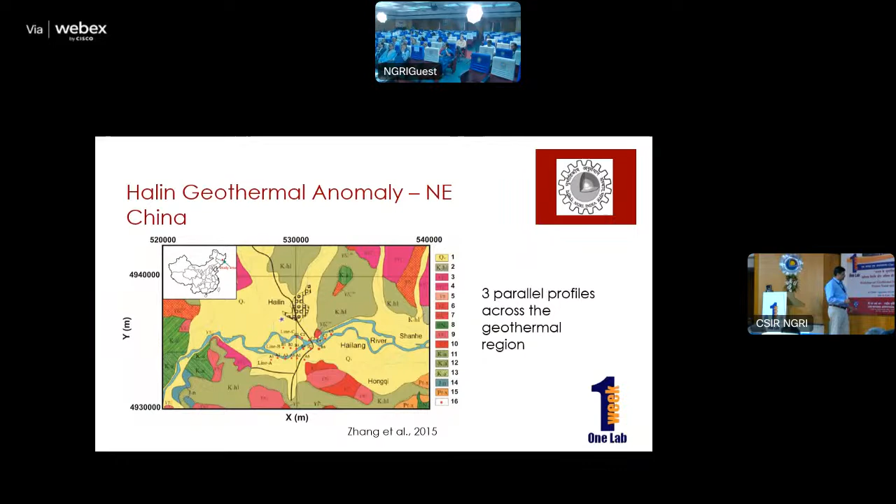In another area in northeast China, they did a similar thing. See, this is how they go. They did a lot of modeling here, but finally they could drill in the location that MT had shown.

Another study in Japan used AMT studies, that is high frequency data. They could map the reservoir and see the connection. See, this is connected like this, the C3 is a connected one. So these studies helped them for drilling.

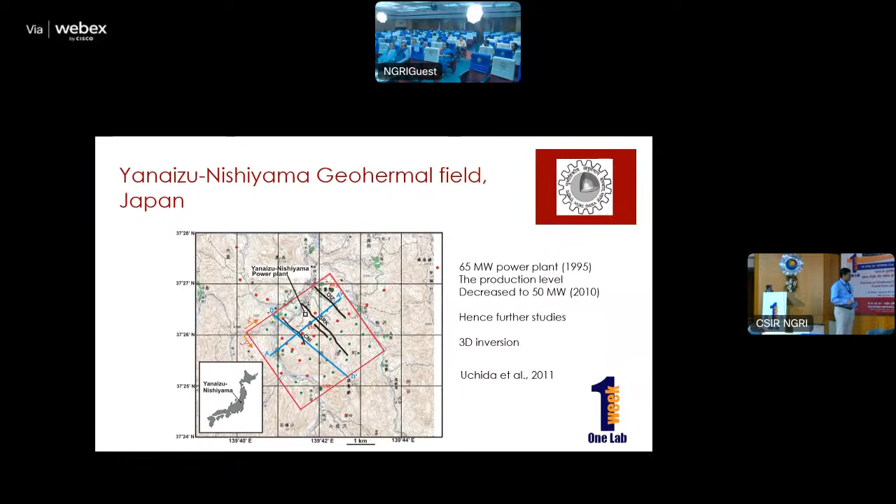One study had a 65 megawatt power plant that decreased to 50 megawatt. It was established in 1995, and by 2010 it had decreased, so they went for further studies on what could be the reason. They did a huge 3D study, a 3D grid, and then could plan their strategy to regain the power production.

This shows how a number of borewells were drilled, and MT helped them get this signature. They also corroborated it with heat flow studies and temperature measurements, and finally could concentrate their efforts here.

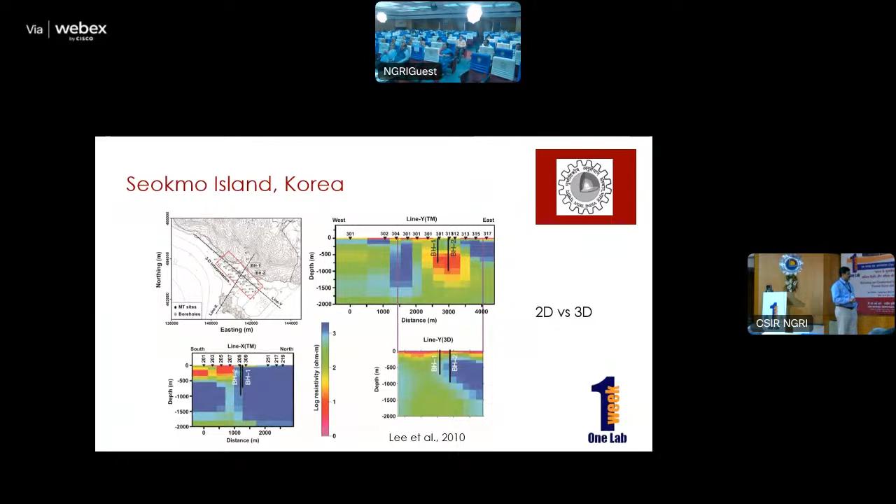Based on this, they planned 2 bore wells, but then they felt that when they did a 3D inversion, the inversion was more suggestive than this. What they saw is this is a very good conductor. They thought they're hitting the target here, but that's not correct. So this has guided them to properly plan their drilling program, and the dipping part is also seen from the 3D model.

So this is why it is very important to handle the MT data very carefully. I'll just give this example, but having said the importance of it, I also should bring some of the cautions that we take while interpreting the MT data.

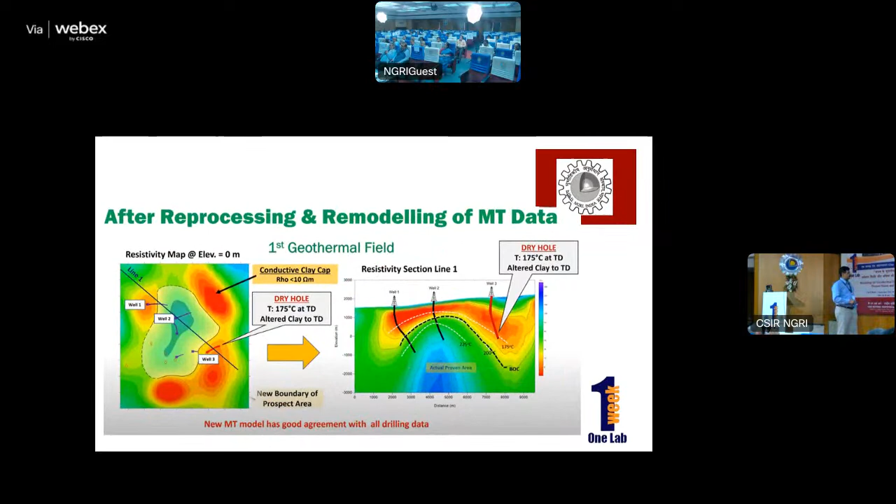To summarize, what I'm trying to say is that we have many challenges and many things to be understood for geothermal resource exploration. Different methods and techniques are there to address each of them. But if you see them, MT somehow plays a crucial role in identifying and mapping these geothermal reservoirs. So I say that MT has a slightly higher capability, especially for geothermal purposes.

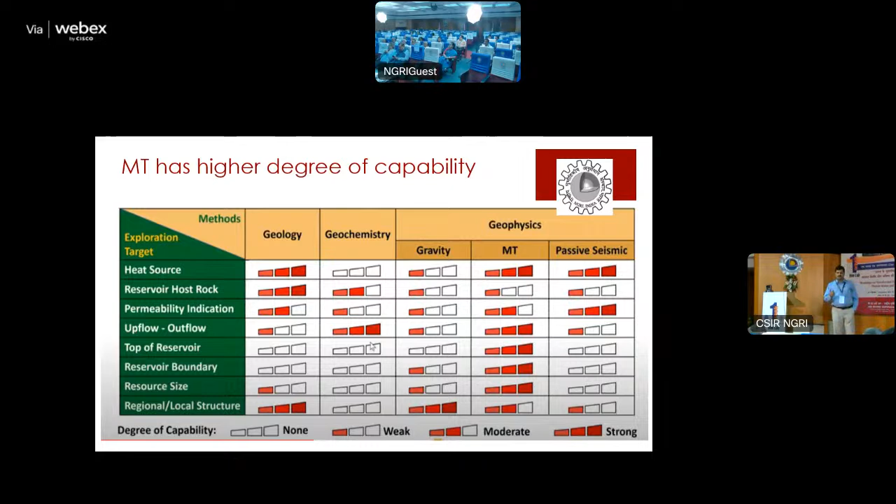So in conclusion, it is very clear that MT plays a crucial role, but we also have to remember that integration of MT results with other CSEM data is important, integrating both of them together. Rigorous 3D modeling of MT data, cooperative modeling and joint inversion considering the temperature, porosity, and permeability is very much important in order to really identify these zones.

So while a good conceptual model exists for high enthalpy regions, for low enthalpy regions we don't have a good conceptual model that is very area specific.

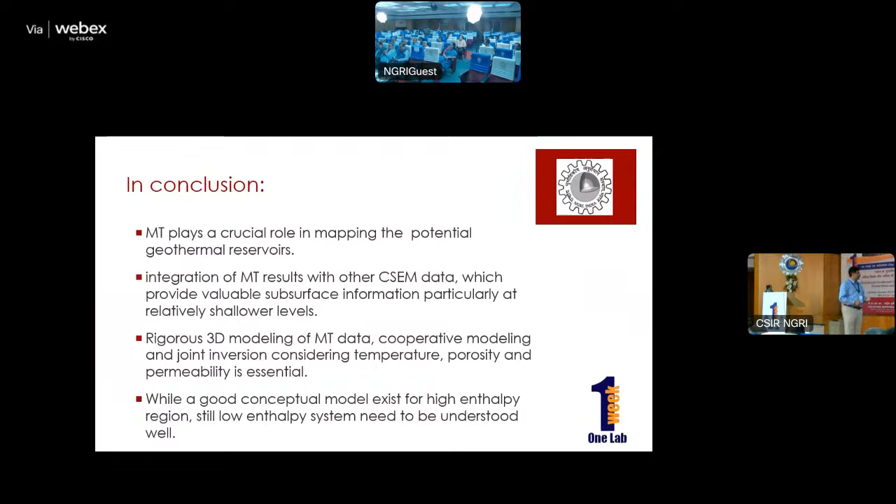At NGRI, we have developed an app which works on Android, where we have compiled all the published MT data, MT publications, and MT models that can be downloaded. Also, our group developed a processing technique which is freely available, a Python-based processing technique. Those who are practicing in MT can download this and make use of it.